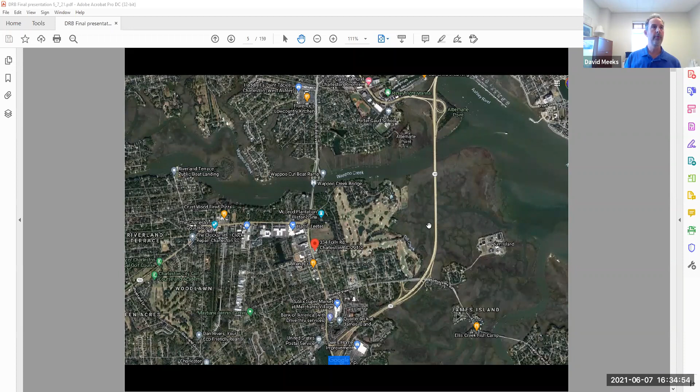Thank you, Erica. Just a couple context slides before we turn it over to the applicant. This shows the location, 334 Folly Road, and then there's a closer view. It's at the corner of Tatum and Folly, and it's adjacent to McLeod Plantation here.

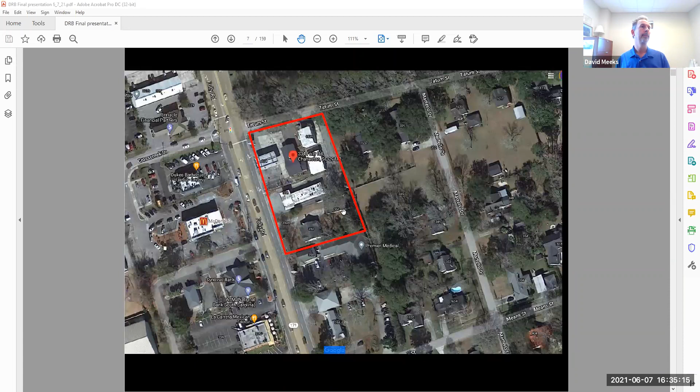And then this is a closer view. The board had seen this already and had approved the demolition of these structures. And then just some views into the site, looking down Tatum and then looking south on Folly.

With that, I'll turn it over to the applicant. Afternoon, can you hear me? Yes. I'm Chris Friend, I'm with Graham Group Architecture, and I'm here to present a different design than what you saw before.

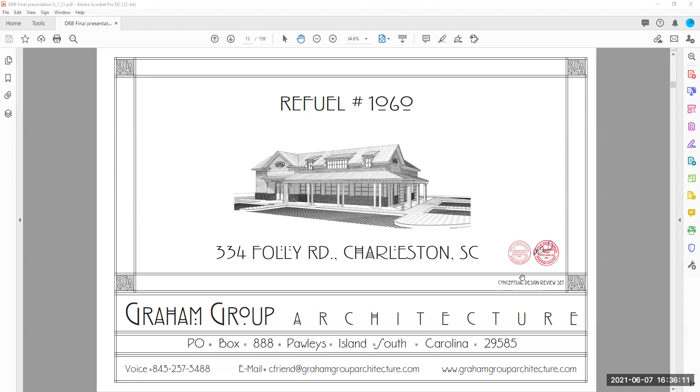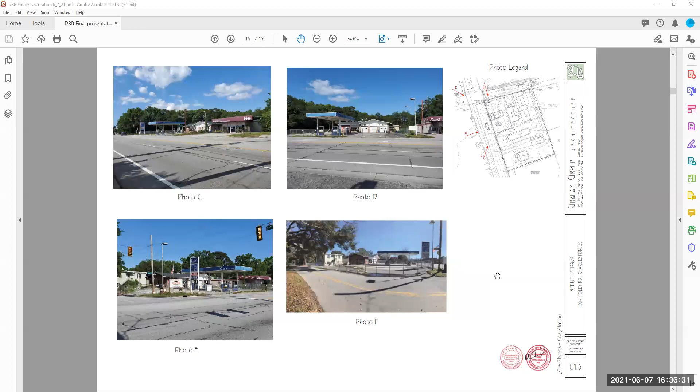David, if you could advance to the third sheet. These are some more site photos similar to what David just showed you all. You got an aerial view of the site and a little bit of the buildings across the street. More of the same, what the site looks like currently with the fence on it, different angles from Tatum and from Folly. Next sheet - these are the structures that have already been approved for demolition.

Which I think we could probably skip past most of that, given that you've seen it. If we'll go to sheet number 12. Unfortunately it's not numbered the same as when you sent it to me. You're right there, okay, back up one. Yep, that's it right there. This is the

Site plan that we would prefer. I understand there were comments from the previous submittal, but I'll try to explain the preference for both the orientation of the building and of the car wash. It is preferred that the building face the fuel canopy. The entrance, which is right now on the Folly Road side of the front facade, to the right of that is where the service counter is, with windows so they can look out to the gas canopies and kind of monitor what's going on there. It's a little bit easier for people at the gas canopies if they want to run inside real quick for a drink or something, just to access the building. There is a side entrance also on the east elevation.

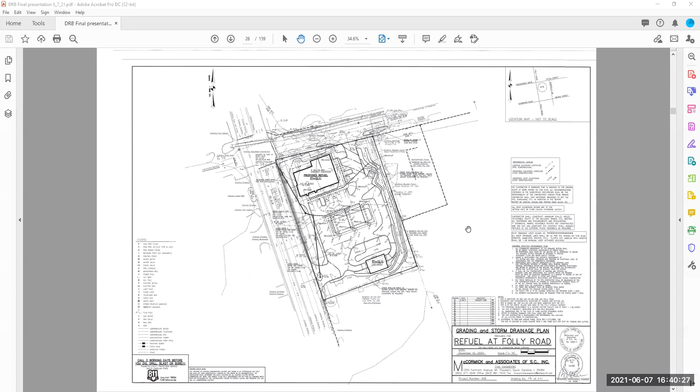We could maybe move into the elevations and renderings and cover drawings, David.

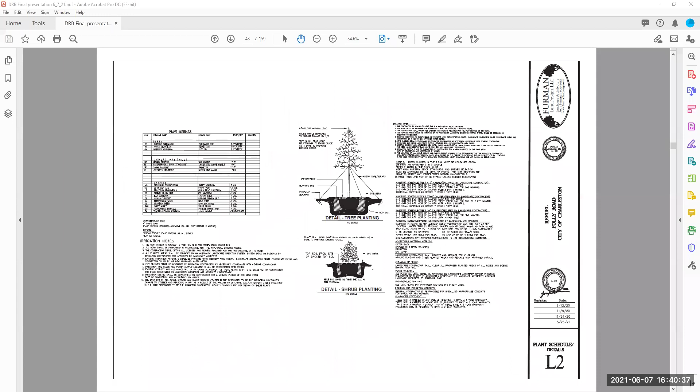Yeah, we'll start here. Okay.

The concept for the building was not necessarily to be a low country derivative, but certainly have some of that vocabulary in the details, with the low sloping roof for the porch, dormers, shed dormers, things like that. We tried to keep it fairly simple in form, but functional and attractive.

You'll go to the next one, please, David. It'll show the other views of it. There's also a porch along the back of the building, so that'll be more for employees. Mirroring the building will also allow easier access from this rear entrance to the dumpsters, which I think would probably be preferable.

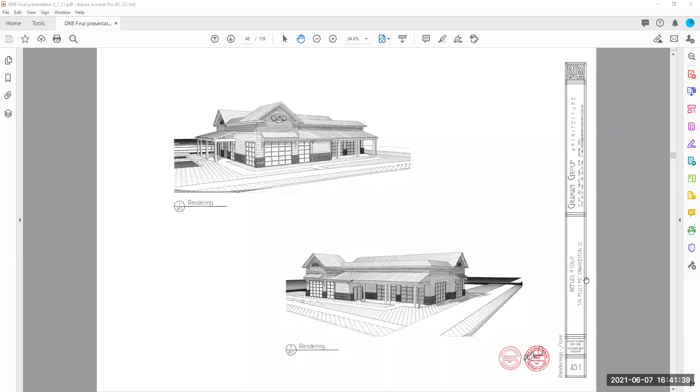We'll advance to the next one. Let's go ahead and look at the color stuff. Actually, the next one's the car wash.

Before I go into this, we'll present some better 3D renderings for the next submission. The person we used to do the color renderings was going on vacation the day that I asked him to do it, and he wasn't going to be back for two days. So we used a program in-house, and it kind of washes out some of the details a little bit.

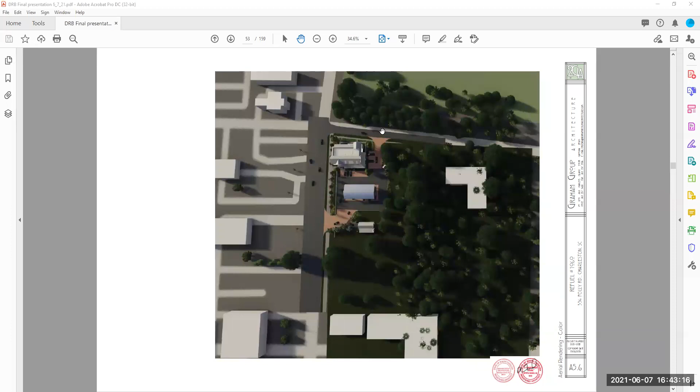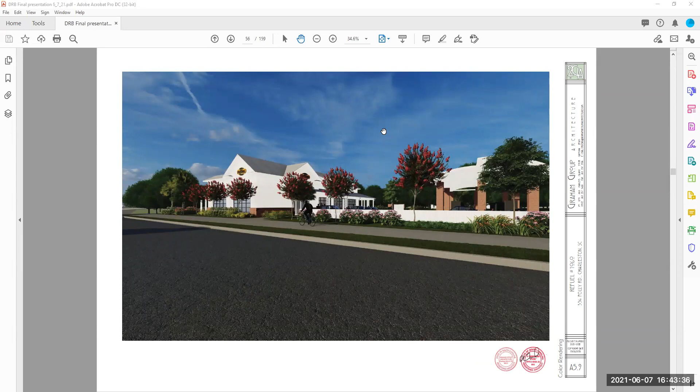The next one here, you're turning off of Tatum onto the property. And that's from the corner of Folly and Tatum. And this is coming up Folly Road. And that's the drive off of Folly Road there.

You can see kind of some of the mass of the buildings on the other side of the street. Another shot from Folly. This is going south on Folly. You can kind of see the car wash there a little bit. We're trying to screen it as well as we can with landscaping.

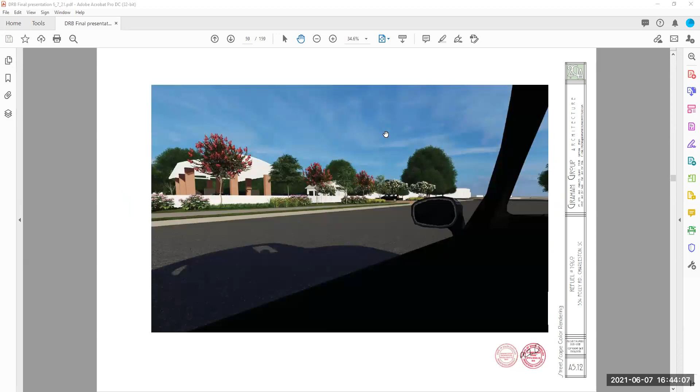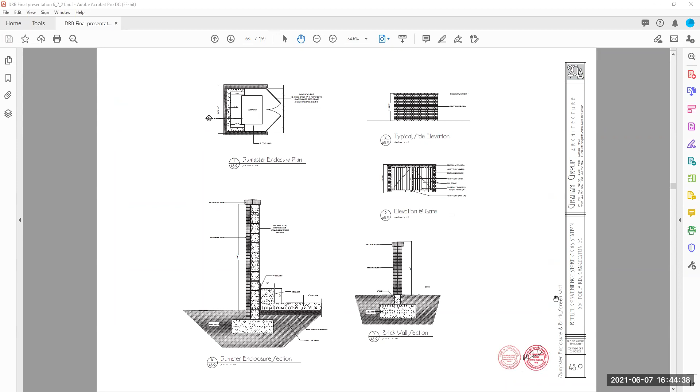And there's another view, this one's as you pulled onto the property. And then that's just dumpster enclosure, fuel canopy drawings, excuse me.

Okay, I don't know if Michael, the civil engineer, wanted to add anything. No, not really. This is Michael McCormick, the civil engineer.

The biggest thing I can see is we've added screen walls all the way down Folly right-of-way on each side of the drive. The proposed driveway location on Folly Road can't move; it's got to be centerlined on the Synovus curb cut across Folly Road as part of the TIA and T&T at the city, so that's a fixture. We just have to overcome the screening of the tunnel that is desired. That's all I have.

Thank you. Any questions from the board? I had a couple of questions, just curious about a couple things. Who may describe the use of the porches - there's two porches.

That site plan actually worked quite well, I think. The porch that's on the corner of Folly and Tatum, who uses that? That'll be, well, it was more to give it a more consistent look on the rear of the building so that it doesn't look like the rear of the building. But that'll be for employees coming and going.

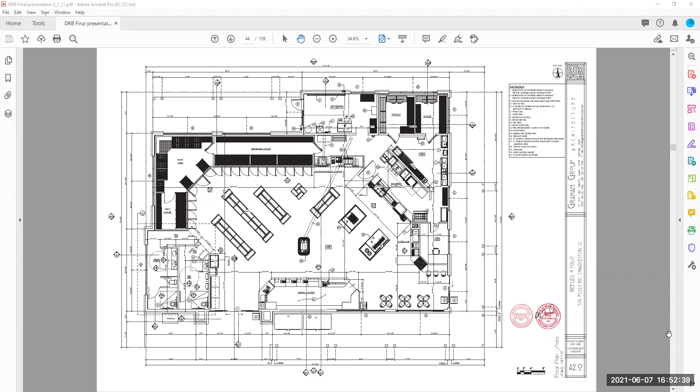Let me ask about the downspouts - I was trying to find them, and when I looked at the elevations I was confused. Do they go back to the wall? How are those downspouts, particularly? You have downspouts along the porches which go back to the column. The ones along the rear of the building go back to the wall. On the rear where you have the porch, they go underneath and back to the wall.

No, not back to the wall. Porches - all the porches just return to the columns or the posts. Okay, so the downspouts go down the posts. Yeah. There are some along the back facade where we have scuppers, and they just come down onto the roof below it, and then off of that porch roof there's the gutters.

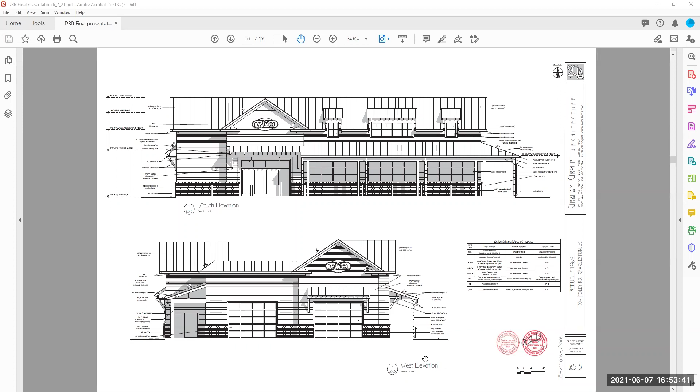Okay, one other question. On your landscape plan, L1, by the car wash, you show tanks. Are those below grade or above grade? They're underground storage tanks located next to, between the canopy and the car wash, but set off into the green space so sump covers and things like that don't get knocked down or subjected to vehicular traffic, so you run into fewer environmental compliance issues.

All right, and I was going to ask Chris one other question. Have you been to the site? Yes, sir, I have. Was there anything particularly inspirational from a design standpoint, or a context standpoint, that you felt was prevalent?

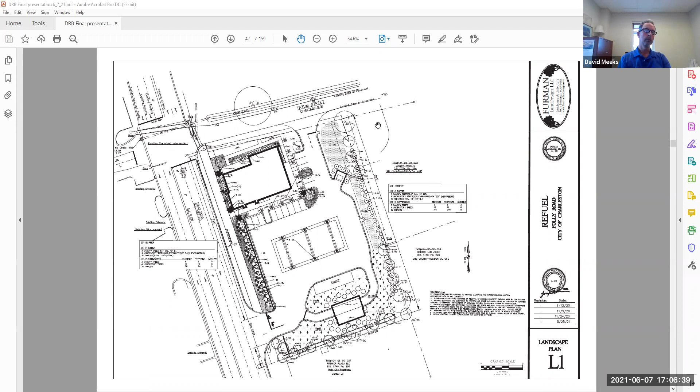We have a tree along that southern facade that can't be removed, and we can't be within a drip line, which is somewhat dictating the position of the building and the car wash. There's also some drainage requirements along there, which Michael can address.

Does anybody else have anything? This is Michael. We could certainly take a look at rotating that car wash to alleviate some concern there. But between the car wash and the property line, we're going to have a water quality swale there. I believe there's a couple protected trees we've got to stay away from, and so forth. But we'll make every effort to do it.

Okay, thank you. With that, we are now in board discussion and a motion.

This is Dinos, I guess I'll jump in first. I think the struggle that I'm having is not unlike some of the initial design that we saw a few weeks ago. I think the key issue is editing and simplifying the design.

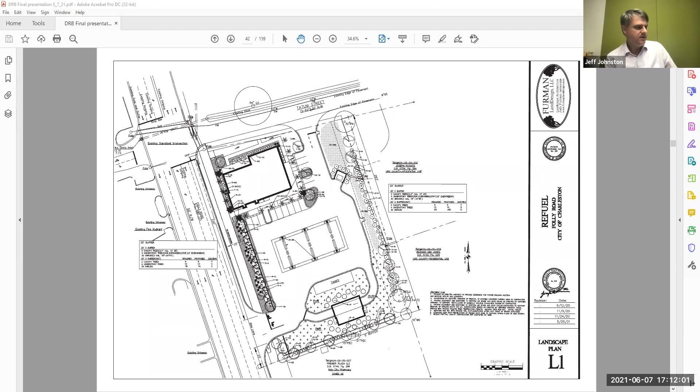I'm not sure I saw an elevation, and this is often the case with gas canopy structures where there's almost like a streetscape elevation that shows the canopy and the building in the same elevation. We rarely see them in the same scale on the same drawing next to each other, so it's kind of hard to tell how they relate to one another.

One suggestion might be to lower the brick on the gas canopy. The brick piers seem really heavy, but that might be a drop in the bucket to the bigger challenge with making the two more compatible.

I agree, Jeff. They're alien to each other as far as form is concerned, and not that the gas canopy isn't cool. The idea is very nice, but I think the relationship between the two geometries is just alien to each other and is almost conflicting.

So maybe the comment is just to try to figure out a way to mesh the two aesthetics or make them more interactive. And not just facadal - I completely agree with what you said. Not just facadally by putting a wave on the front of the building, but actually looking at something more substantive that brings the two together.

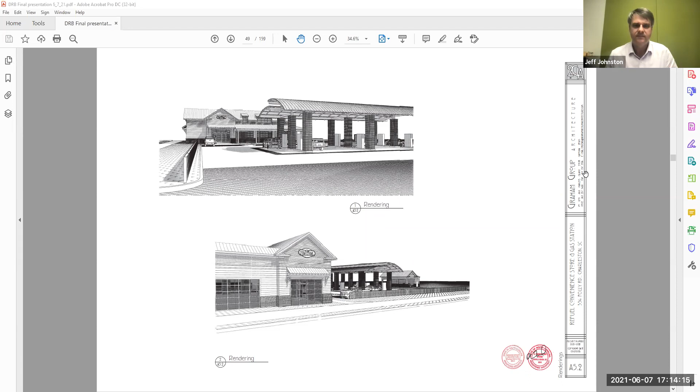Yeah, this is Andy. I mean, I agree, Jeff. I'm sitting here trying to find the right word, and the only word I can really come up with is confused. I feel very confused about this. You have the building, you have the gas canopy, you have the car wash, and for something that's supposed to all relate together, I don't feel like they do very well.

And the site itself doesn't relate to itself very well, doesn't relate to the outside world very well. And the set of drawings itself could use some editing, and I think that goes through some of my confusion. There are things in the set that aren't in our purview, and we probably don't need to see, that are just burdening down the stuff we have to look through to try to determine where we're getting to in this project. I don't know, I can't support, I guess, where we are right now, and I think there's a lot of editing and redesign that needs to go in before we can get there.

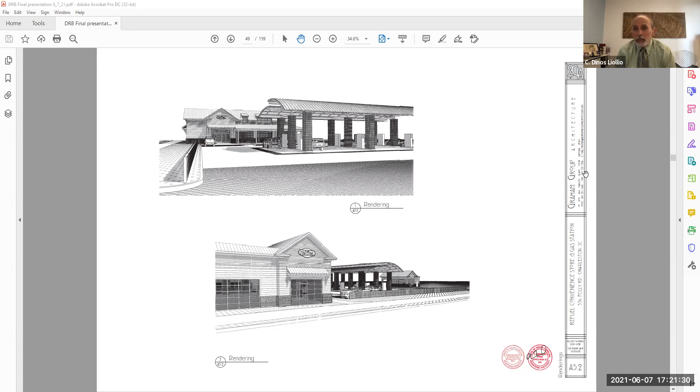DRB should comply with the submittal requirements. Look at the submittal requirements and comply with what is asked for.

Well, I agree with that. It is nice to have things like your grading sheet. The grading sheet's fine, that's really not what I'm talking about. There's just like erosion control detail sheets, right? Yeah, detail sheets. I mean, these things are just not really in our purview and not something we need to see.

And just once again, in a set where we're trying to understand what you're communicating with us, those just add additional items.

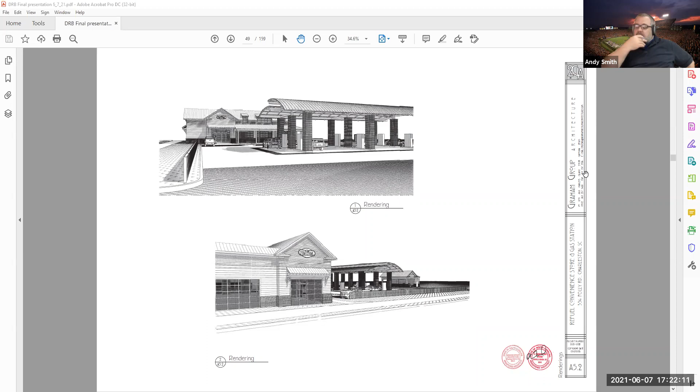I didn't touch on it because I kind of saw where we were going, but would like to add into the motion to edit the plant list and focus more on native plants rather than an adapted palette. I think it would really help the context of the project. Okay, Dennis, is that okay to add?

Absolutely. Okay, so we have a motion for denial with staff comments 5, 7, and 8, along with board comments: 1, address the reconciliation between the geometries of the buildings; 2, simplify and edit the design of the building to be more in line with nearby contextual buildings, particularly McLeod Plantation; 3, be honest in treating facades to the floor plans by eliminating facade treatments to the buildings that are not honest to the floor plan.

4, edit the plan set down to what DRB has purview over. And 5, focus the plant list on native plants. Is there a second? I'll second it, this is Andy.

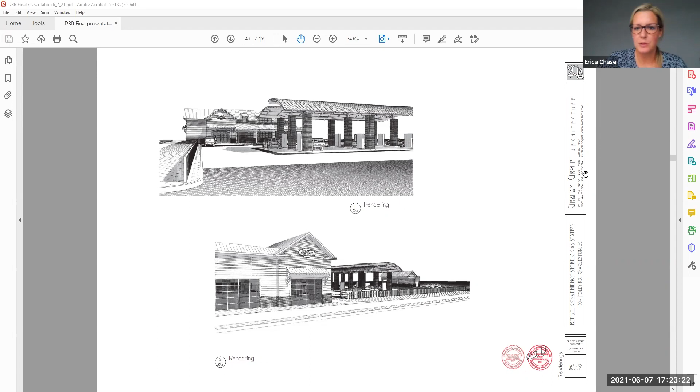Okay, I will now call roll. Jeff? This is Jeff, I'm in favor. Kristen? Yes, in favor. And then I'm also yes, in favor.

Thank you very much. David will be in touch with staff regarding the motions and comments.

Next on the agenda is item number 2, William E. Murray Boulevard at Glenn McConnell Parkway, requesting conceptual approval for a multifamily residential community consisting of 3-story townhomes and 3 4-story multifamily buildings plus a clubhouse.

I have just a few context slides for this. Here's the location of the site. It's at the corner of Glenn McConnell and William E. Murray. The board should be familiar with the site across the street to the northwest, which was the Founders apartment complex we saw recently. Here's the location, you can see the red boundary.

And then looking into the site, I believe the site's already been cleared from a previous applicant. This is all I have because the applicant has a few more context slides. So with that, I'll turn it over to the applicant.

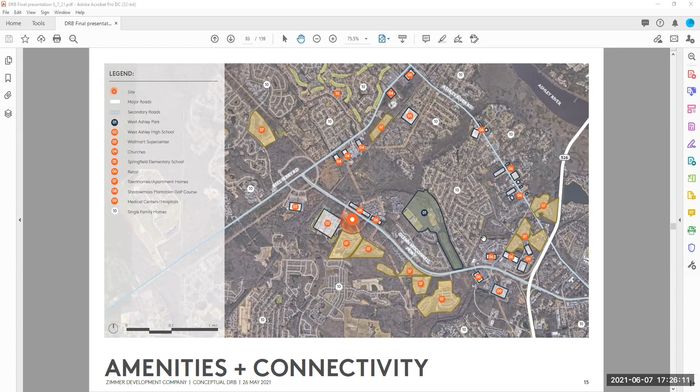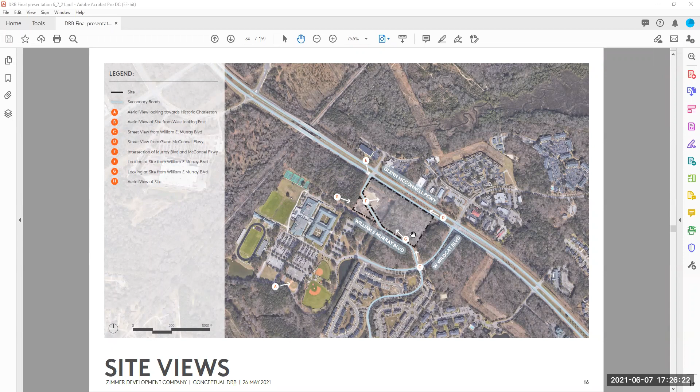We've kind of notated the significant features around the site: elementary schools, churches, shopping centers, and the major arterial roads. And next, please. These are the views we're going to show next, of the site from the various intersections and roads. So next slide.

Which would be the north of our site. And I think there might be one more slide just showing existing cleared features of the site. And then if you wouldn't mind going back kind of to the beginning where the site plan is.

So we worked significantly with staff on developing a site plan that we feel works for the site.

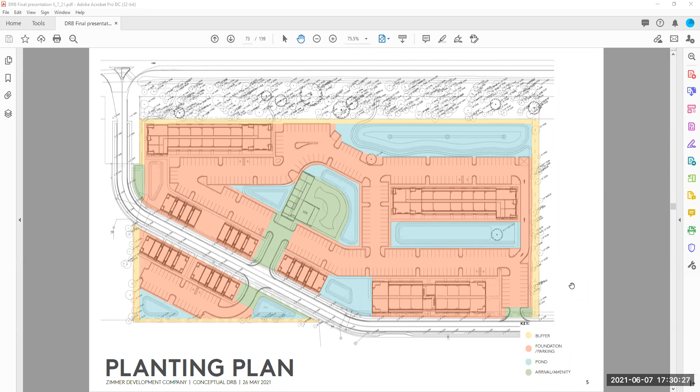Let's go to the next slide. There's basically a plant palette for each of these areas. For buffers, we're looking at evergreen shrubs and really trying to get an almost 100% native palette for this site. Also low maintenance, things that won't need to be pruned, that can naturalize and live happily in the buffer, where we want to screen and add to some of the existing trees around the edges.

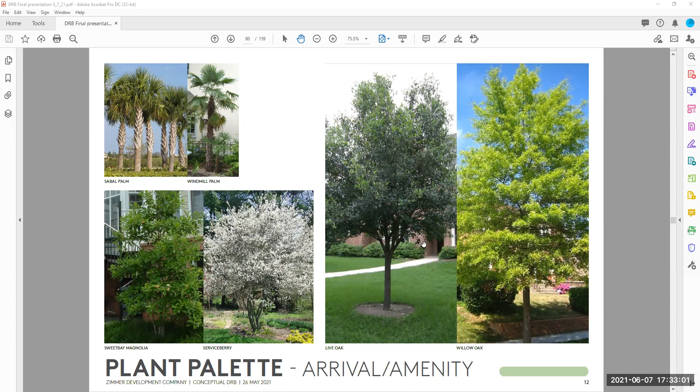Next. Okay, how are we doing on time? I think if we can fast forward to the renderings, there we go. Thank you, I have about 3 minutes left. Okay, but we're a little bit flexible if you go a couple of minutes over. Thank you so much.

So we have a few renderings included in the set. In the lower right-hand corner is a key as to where the rendering is taken.

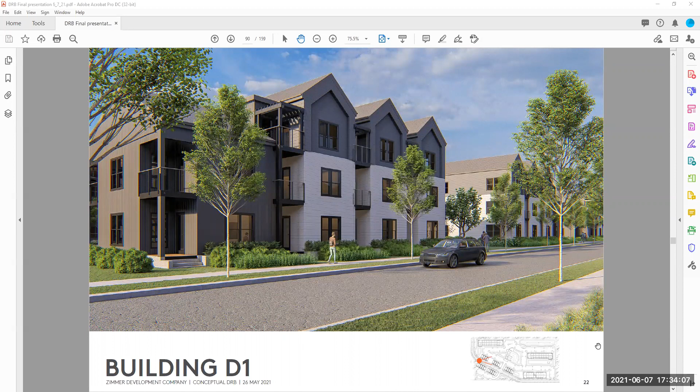This is giving you a view of the townhomes as you enter the site. You can see on the left there is a shorter 2-story building. We've then stepped the buildings up and added the gable roof forms, which are a nod to the historic Charleston neighborhoods. We think pedestrian experience is really important here, so we have entries off of the sidewalk and porches to activate the street, along with pergolas at the upper level to really engage the street. Next slide.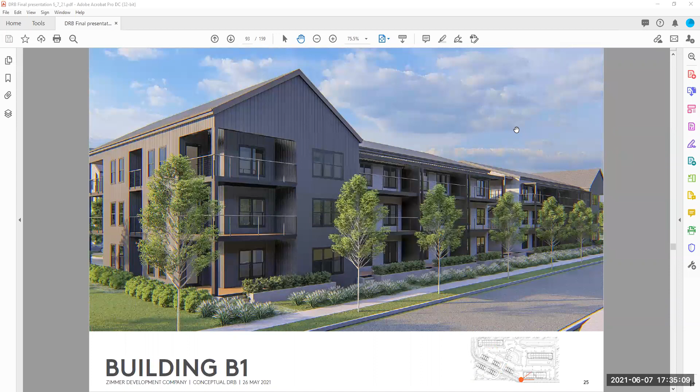Next slide, please. And then this is the 3-story building. As you turn the bend, there is a multi-family garden style walk up that again, we're trying to activate the street with entry porches. And then we've split it into 2 distinct buildings that have a breezeway in between them. So we feel this way we're really going to be able to engage the sidewalk and encourage activity on the street. And then I think we have one more.

This is the access as you enter the site. So you're seeing the clubhouse beyond as the central feature of the entryway with the 2 flanking lower height townhomes. We feel like this scale, the organization of the building scale, really paying attention to the pedestrian experience and using architectural cues from historic Charleston are the goals of the building and the development arrangement.

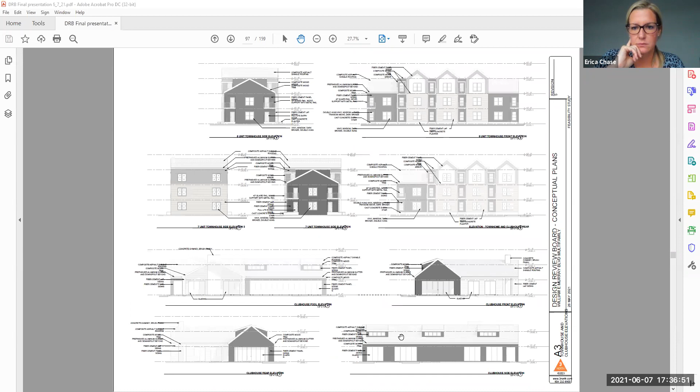I had a couple of questions, and I may have missed it, but in the packet submitted to the city that we got copies of, I didn't see a survey showing any existing elevations, FEMA flood zone, existing trees. I didn't know if I missed it or if it just wasn't included. We do have that, so we might need to. We are currently going for early site package TRC as well, and so we have that information. Okay, and is the project in Church Creek drainage basin?

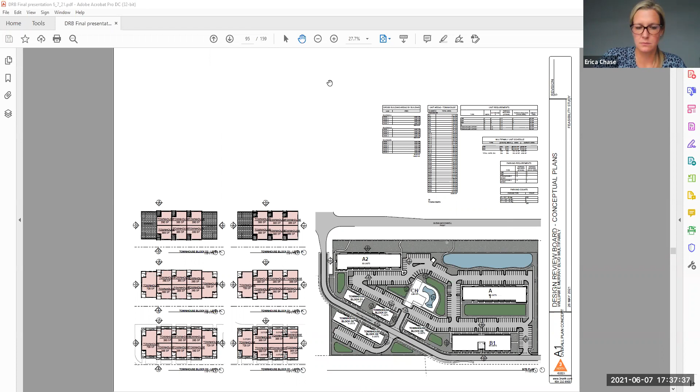I don't know the answer. Paul, do you know the answer to that one? Sorry, I'm seeing if he's on here. He's in the attendees, David. You'll have to let him in. Wait a second, sorry. I'm not seeing him. He's on my list, David. There he is, I'm sorry. He was here. I think he dropped off. I don't see him now. You still see him on your list? I do.

And the reason I'm asking is that there are significantly more stringent drainage requirements, which would affect the layout of the site. And I'm not sure. And then also, just curious from a survey standpoint, one about existing trees and is the site plan working around any existing grand trees? 2, existing elevations in reference to your FEMA zone. Just knowing if your first floor is going to be significantly higher than existing grade. Just trying to understand a little bit more big picture items on the site layout.

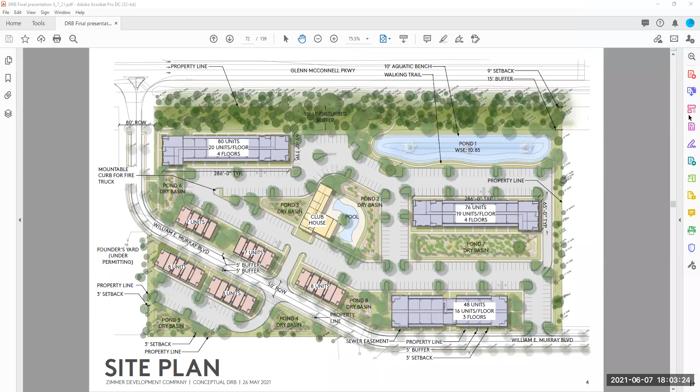Okay, so just the illustrative one that's in front of us right now. Correct. And also, I'd like to be clear that we don't have any excess parking whatsoever on the site. We have the exact number of units to parking spaces. And that's in accordance with zoning ordinance, or market rate? Zoning. Is that 1.5? Correct.

Got it. Any other questions? Or sorry, we're still in comment period, not questions. And Kristen, I apologize for cutting you off earlier if you wanted to speak on your comments.

Oh, thank you. I was just commenting about the clubhouse and the pool and that arrangement. I do like it, and overall I agree with all the other comments. The balconies and the facades and certain elements of the design I do like, but I also have my agreements with all the comments of staff and the board as well. That's all I wanted to say. Thank you, sorry for cutting you off again. No worries. Any other comments or motion?

Well, before that, I'd feel remiss if I didn't have some chance to chat. It's interesting, I guess when I imagine driving in this parking lot, it seems challenging, and I think the reaction is to make it feel more intuitive and organic, like that east entry. As soon as you enter, you kind of have to turn, you either park or you have to turn left or maybe turn right to go around the building. Something a little more organic and intuitive feels more natural, even if it's slight curves of that longer parking aisle between William and Murray, so that your vistas aren't 600 feet long, your vista might be 300 feet long. But I wonder if you could solve it in a more organic way that's not a total rewrite, but more of a massaging of what's here.

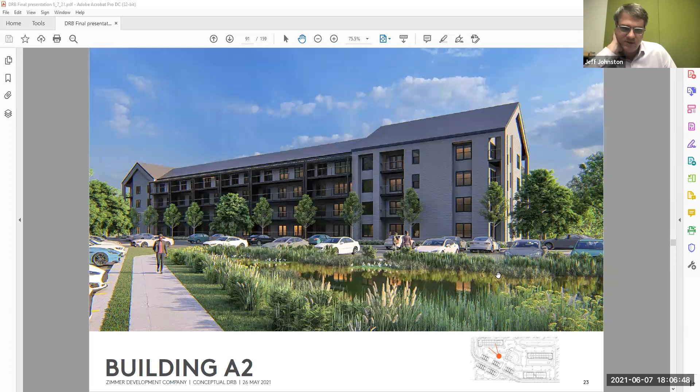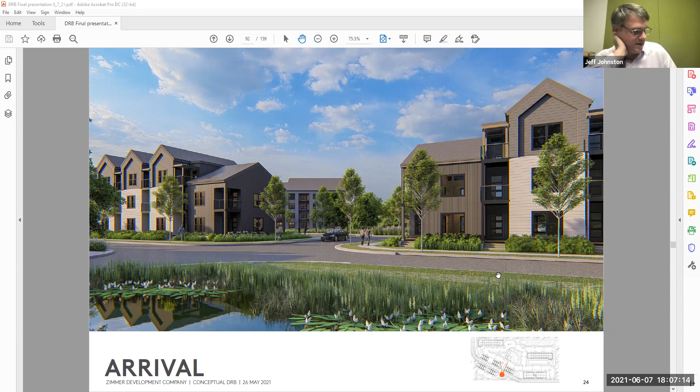Part of it is on the next rendering, called Arrival. Hard to tell here, but you've kind of got the gable form, and then there's an outline of the gable form that goes down, turns vertical, and on top of that you have like a traditional fascia. To me, the traditional fascia seems a little extra. But like I said, I think, and then the next one, building B1, if we can flip to that one, building B, yeah, this one.

You know, we're so close to just breaking this building up. We practically are. We've got that breezeway with the stairwell in it, and we've essentially just mirrored the mass left to right. And I kind of appreciate Dinos's perspective on making these buildings smaller.

You've already got the break, and you're already building 2 exterior walls. You could have some more freedom with the massing, even if one of these wings were mirrored so that it's flat gable, instead of gable, flat gable. Might give that impression of more buildings. So I think, from a floor plan perspective, you're already broken up, but we've chosen to make the massing so much alike that you can't tell it's really 2 different buildings.

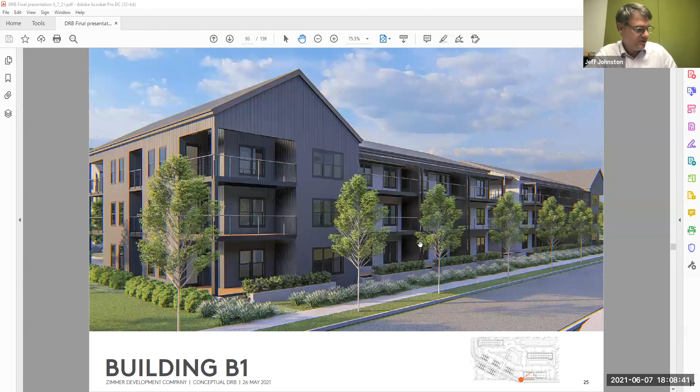So I guess what I'm saying is I think I appreciate the idea of it being two structures, of breaking it up, which I think will help. And maybe it's in terms of the site feeling rigid, and I'm trying to find the site plan again. If you were to have some more flexibility in the buildings moving in and out rather than just being on the same plane, you might achieve some of that organicness without manipulating the site greatly.

I still think you need to manipulate the drives, but I think having more building forms less lined up would help give some of that relief in the site plan. And you've got the flexibility, it looks like, in these longer units by virtue of the open breezeway. So I think taking that and pushing that idea a little bit further would help in a lot of ways.

But I applaud the effort of keeping the architecture honest and being, the mass is what the mass is. And I'd encourage you to kind of hold on to that, but take some of these suggestions that we've said to make it better.

And again, it might be a minority here, but I think that clubhouse entry is really intriguing. Maybe it's underwhelming because the proportions could be slightly improved, the scale and proportion. I'm looking at the other arrival perspective. Wait, sorry to make you go back and forth.

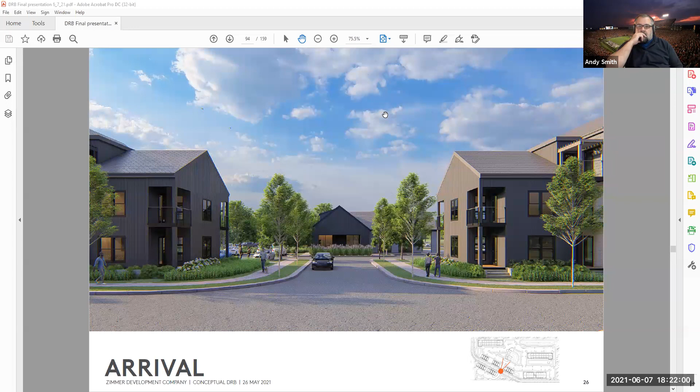Well, Erica, that was staff comments 5 through 13. Oh, sorry, thank you. I'll amend the motion to include staff comments 5 through 13. Thank you. Is there a second? I'll second that motion. Okay, I will call roll.

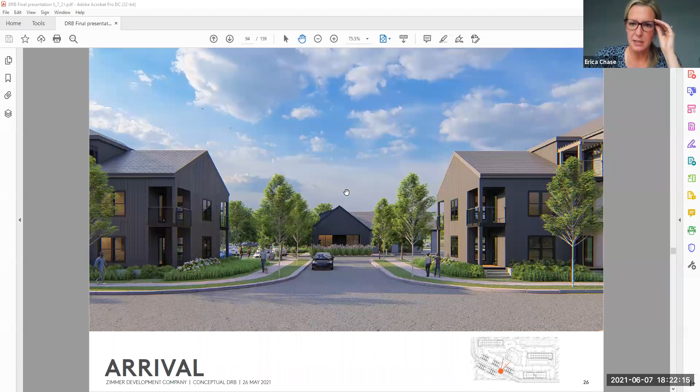Daniel. Jeff? This is Jeff, yes, in favor. Thanks. Kristen, yes, in favor, and for the record, Dino seconded the motion. And then myself, yes, in favor.

Next on the agenda is 829 St. Andrews, requesting conceptual approval for a 2 to 5 story mixed use residential development. And give me just a few minutes and let some people in here.

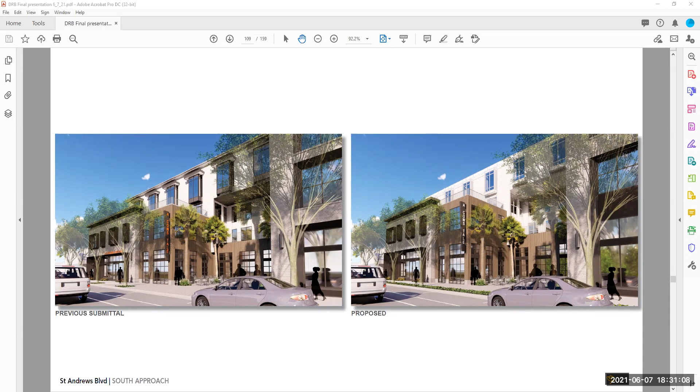We also have some larger detailed elevations starting around sheet A-10 that give you a better sense of the specific materials and details associated with the transition of those materials in those elevations.

Go to the next slide. A big idea here was, again, the hierarchy of elements and the competition between the foreground of the buildings along St. Andrews and the background of the larger forms.

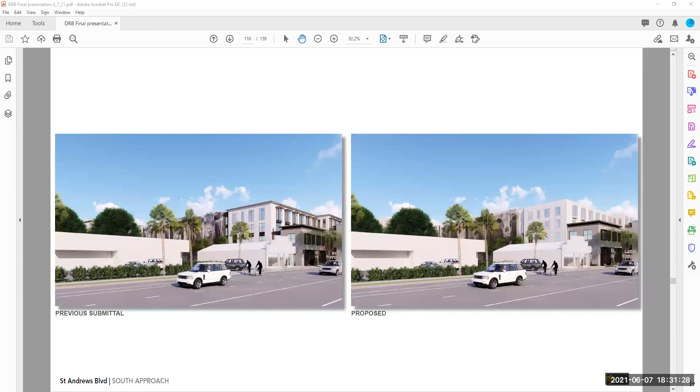We have diminished the presence of the top of the building and simplified the upper form greatly. We did not eliminate any materials, rather we eliminated the quantity of transitions and use of those materials to create a more uniform and consistent legibility to the project itself.

The top of the building participates in various treatments, all maintaining the same profile as it touches the sky in a diminished way. That was very purposeful, and has been very successful in its application throughout the project.

Where possible, elements have been refined to lighten as they move up the building, so now we don't see anything dark or ominous over the top, whether that's a shade structure or the way materials touch the sky in a background nature.

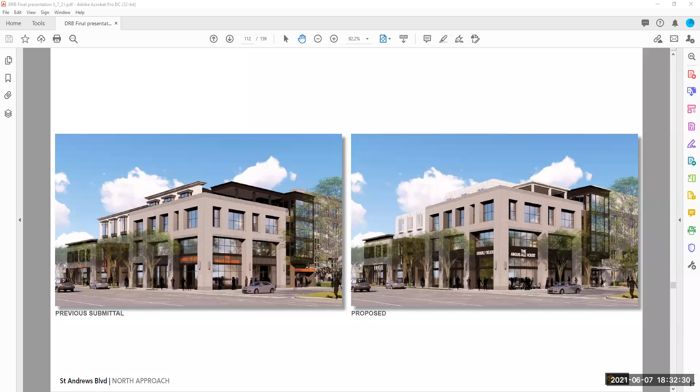Albeit in many ways subtle, there's been quite a number of design changes, ranging from material transitions to advancement of bay windows and rooftop elements and structures, all manifesting toward a place that will layer and provide focus and emphasis on the people space that we want to embrace.

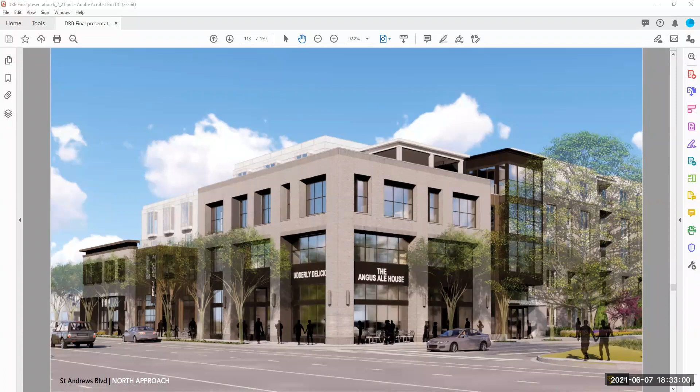Next, we transition to the residences on the ground. Closest to St. Andrews, we're most concerned about the active nature of St. Andrews and the residents who live here. We've layered that; the landscape team has done a wonderful job providing variety and an animated landscape design that layers and provides separation from the public realm into the private realm of those residences.

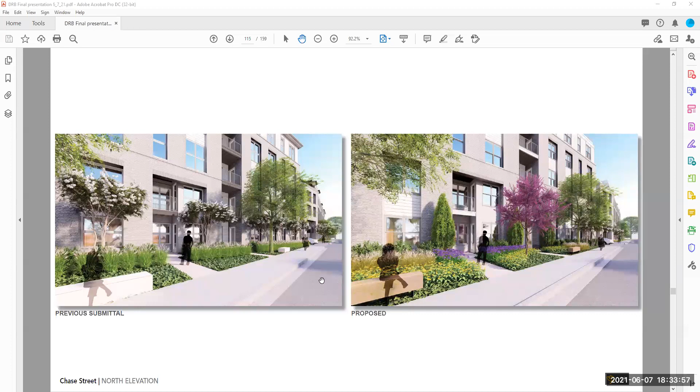This particular comparison shows a number of the subtle changes we made and how they manifest, along with a couple more significant design moves. We no longer have brick that extends above the fourth floor anywhere on the project, and parapet detailing, that diminutive nature as it transitions to the sky, is carried around so it's not in competition with anything anymore.

It allows the recesses and massing of the building to read plainly. It provides a uniform legibility and preserves the focus on the elements we want to really pay attention to and celebrate in design.

I'll do this fairly quickly. You can see how some of those refinements translate down to the rest of the building. We're preserving and more consistently applying use of brick. We've eliminated some of the dark materials off the top of the building, and really enhanced what's happening down around the street level.

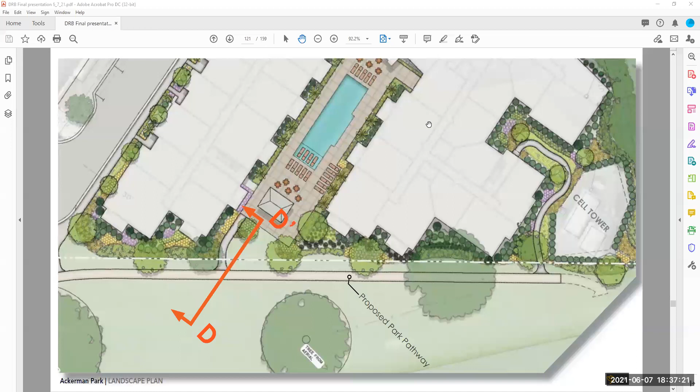This is a little more detailed view of just how much energy is really in this landscape as it transitions and moves from the scale of the building down into the park itself.

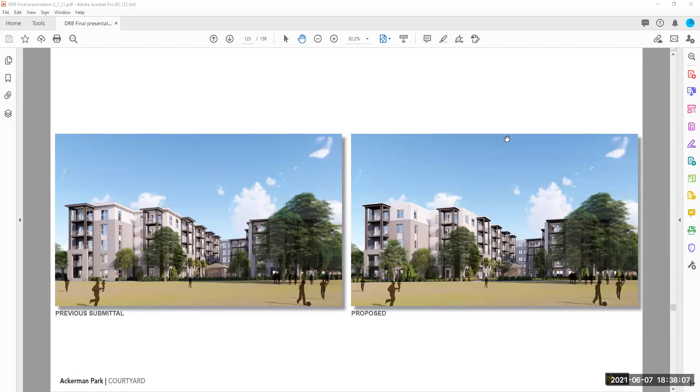I would point out the balconies — we've actually refined fairly significantly some of the proportions of the porches on this side of the building, the way they come to the top and the way those roofs interplay with the finish of the top of the building, in a fairly consistent way, but one that I think continues to reinforce the expression of those porches as a place for people and a place for the residents to embrace the park itself.

There was some specific discussion about this portion of the building at the very end of the last presentation, and we took some time to go back and try to understand what that comment was all about. We applied some of our original thinking to the overall shape and legibility of these elements.

We wanted to keep them calm, consistent. We don't want them to be overpowering, but simple. We did incorporate more brick in this solution, but I think one of our keys here is just how simple these forms can be and need to be as they turn the corners and really become a passive part of the project to the project's south.

So in its consistent treatment, its detailed use of materials, we're really just trying to complete the project in a cohesive way while maintaining the quality of what the project's doing on all of its sides.

I did that very quickly — there's a lot of detailed information in the set. We're happy to answer questions, talk more specifically about design decisions and maybe some of the subtle things that are evident in the renderings or may not be. We look forward to the discussion and working with this board to come back for preliminary approval. With that, thank you.

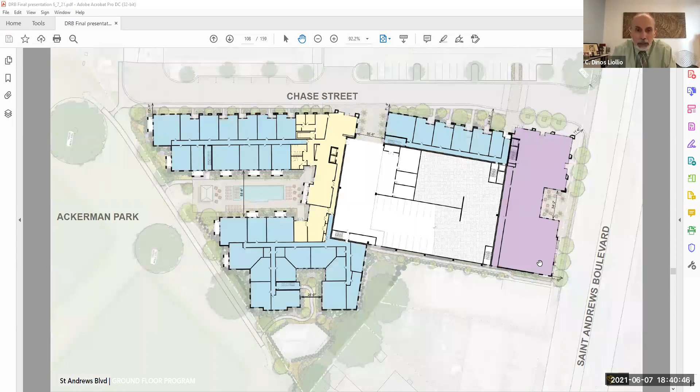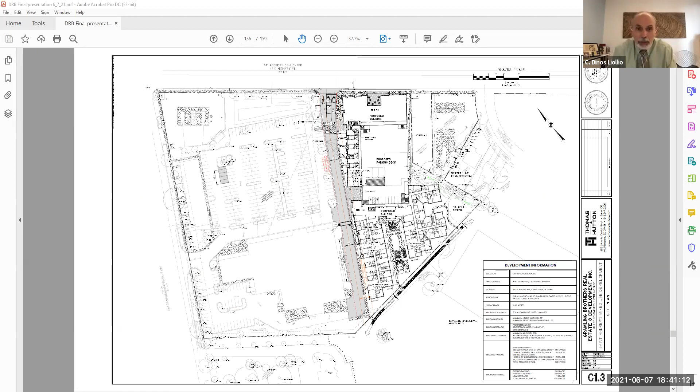David, can you go to C1.3? Oops, sorry. That's all right — I didn't think that looked like Nathan's project. It was on the civil drawings. Oh, I'm sorry, civil drawings, yeah, it's back in this way. And I can ask — there we go, there we go. Can you blow up into that, I'm drawing on my screen. Keep going, blow it up some more, and move it toward the center. That works — yeah, that's perfect.

On the Mix One property, which I understand is owned by the same developer, you're abandoning a property line at the base of that. I was just curious why.

I'm gonna have to phone a friend on that one, actually. Tony, do you have a moment you can? I'm not sure I know.

It was just when I saw it, I was curious. I didn't know if it was for anything specifically dealing with this project, but it just caught my eye.

I can— No, oh okay. I can answer the question.

It's Michael Harper. You know, all of these properties were separate parcels that we assembled over time, and they're all zoned general commercial. They're all zoned at 26.4 units of residential density per acre.

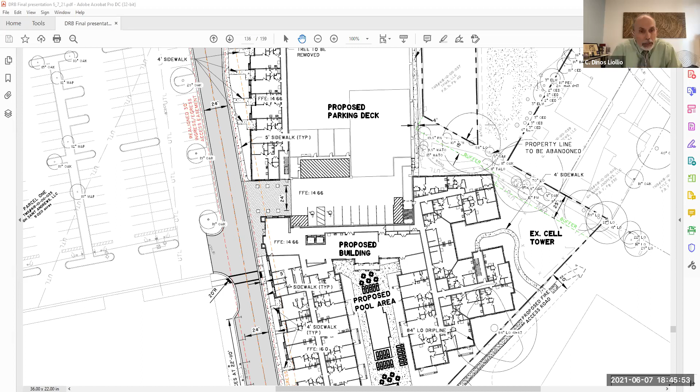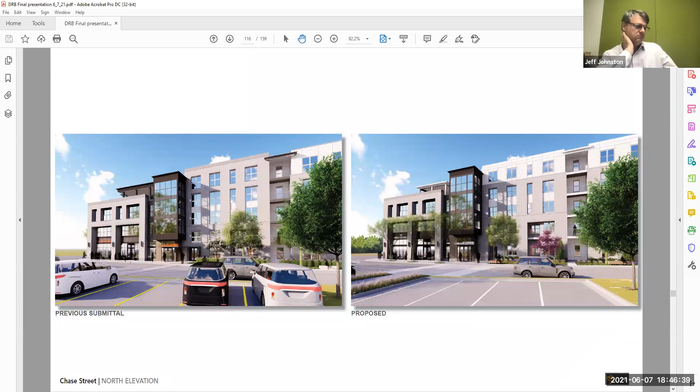Nathan, you had mentioned also a tabletop crosswalk. Yes, if you slide back—it's probably most visible on slide 14 of the presentation, David. So there's a tabletop crosswalk: you see the main entrance there that takes you up to the rooftop, and there's a small tabletop connecting from the island across. We expect some people visiting this retail and project to park in the parking lot, and we tried to be very deliberate about giving them a safe, well-designed way to get across that drive aisle.

I just tried drawing on my screen too, Dino, so you're not the only one. We need to put our pens down—I've got pen marks all over my screen, Nathan.

So basically the landscaped portion kind of defines an access across the tabletop walkway. Correct, yes. Is that what I'm reading? Okay.

I was just curious about the abandonment of that property line. If it has nothing to do with the evolution of this design, we don't have to wait for an answer, Madam Chair, as far as I'm concerned—I was just curious.

Oh, Tony Woody is available. I had one more question. Go ahead. Hey, I'm sorry, Madam Chair.

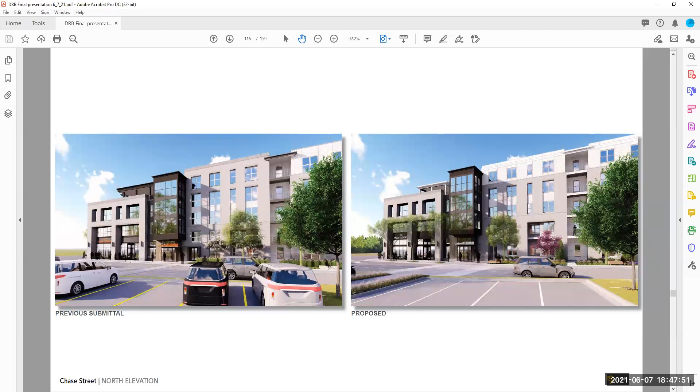This is Tony Woody. Yes, I think you all got it right in our absence—it was early on in the site discussions, we talked about abandoning the property line, bringing the MEX one into the city, but ultimately, because the MEX one is in Charleston County, unincorporated, and not the city of Charleston, we cannot abandon that property line, so it will not be abandoned. Okay, thank you, Tony. Yes, sir.

I had one more question. How were the sidewalk and pathway widths determined? They seem to vary throughout the site plan, mostly between 4 and 5 feet.

Could you talk through the thought process there? Maybe David, go to slide 3.

Granted, this is a more graphical representation and not the technical one. I think the intent of the design was to create as active and fluid a pedestrian space as possible along St. Andrews. Where we expected more people, you'll see broader sidewalks and more hardscape, with more planters and other site furnishings along that area.

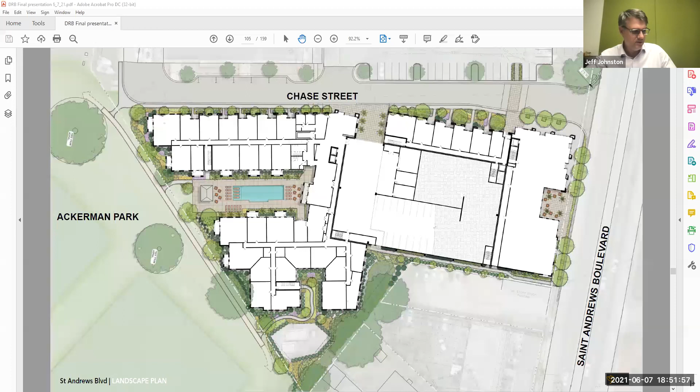Thank you. Any other questions from the board? To couple on that, if we go to the technical documents and look at L1.1 and some of the other L sheets, you can start to see the sidewalks in diagram.

I think the last time we had this application, we had a lot of questions about what happens along St. Andrews, specifically the relationship between the building face and the curb. We'd asked for this blow-up with some dimensions. We got the blow-up, but I don't see any dimensions, so I'll have to ask, let's walk through some of these.

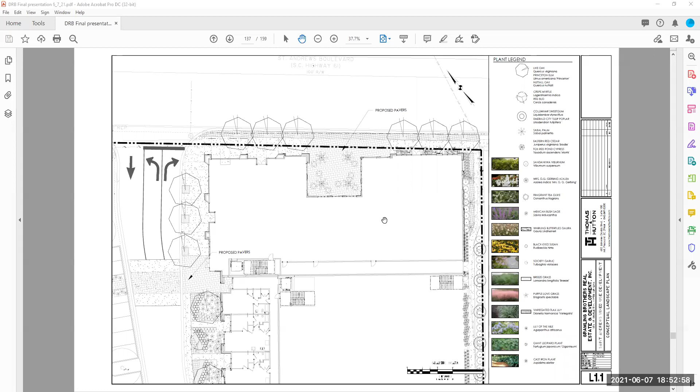On the northeast corner, between the building and the curb, is approximately how many feet? On the right-hand side, that is 11 feet 6 inches. Between the building and the curb? Correct. I think the dimensions you might be looking for are actually on a different sheet.

Let's try page 106 of the presentation. Sorry, I was trying to get them in a place, Jeff, where it would be clearer. So 11 feet 10, it was wider than I thought. Where I think you were asking is down there in the bottom right-hand corner - it's 11 feet 10, slightly behind the adjacent bridal shop.

Got it, 11 feet 10 on the bottom, and at the corner it's 11 foot 6, is that what I'm seeing? It is, and that's a little deceiving because that's the tightest point on the radius, and the radius is set into the building. If you went out perpendicular from the face of the building to the curb, it's closer to 14 feet.

On that 11 foot 10 zone down at the bottom right, how wide is the verge? It is 4 feet. And that is consistent just along St. Andrews - there's no verge along Chase, which is different.

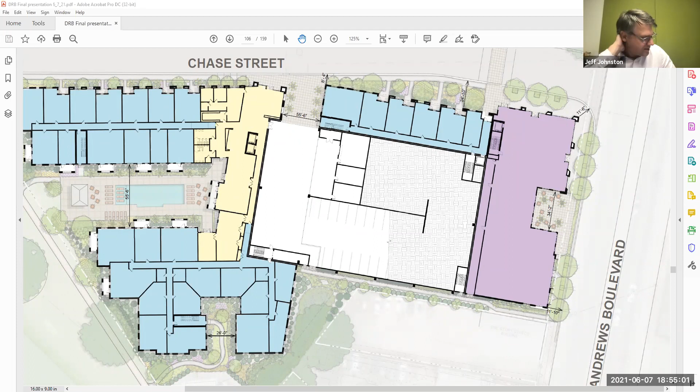Okay, right, because you've got 11 foot 10 minus 4 feet. And it looks like there's some planted areas. If I go back to L1.1, there's some planted areas, so the continuous sidewalk looks to be 3 to 4 feet less than that. So it might be like a 4 or 5 foot walk is what I'm seeing.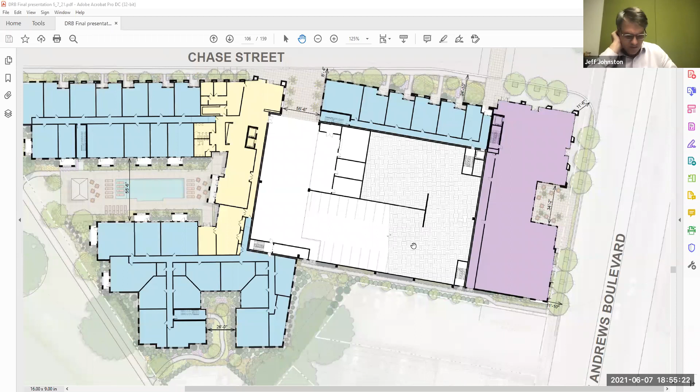And that would be, like I said, L1.1, draw on page 35. You want me to go there, Jeff? Well, I think it'd be helpful, yeah. Which page, sheet L1.1? It's in the technical document.

So if you zoom into that top right corner, we've established that from the building face to the edge of the curb is 11 foot 10. There's a 4 foot verge that makes to the edge of the sidewalk, to the corner, 7 foot 10. And if you zoom in a little bit more, you'll see some more planting areas there.

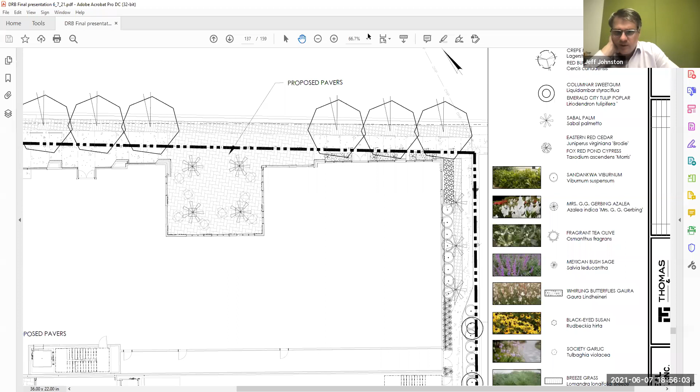I'm just trying to understand what I'm seeing, that's all. That's fine. This is about 5 feet, Jeff, outside of the planting areas, at the tightest point. Got it. About a 5 foot walk connecting.

Okay, great. And then as I see, 3 oak, that looks like live oak trees according to the legend. And then the sidewalk broadens to a paver area and goes into this cool little courtyard zone and continues on to the corner of St. Andrews and Chase. But at this particular spot, the sidewalk chokes down. Could you maybe speak to why it chokes down right there, and maybe how it relates to the paving in place at the neighboring site?

So the neighboring site, the sidewalk goes straight to the face of the building. We are playing a little bit of a game. So the actual dimension - I've got to phone a friend here - it's 5'6" of actual sidewalk at its narrowest point there on that corner. What you're seeing, those planted areas in the face of the building, participate in these sort of shadow box profiles that we have developed in the architecture there of the facade.

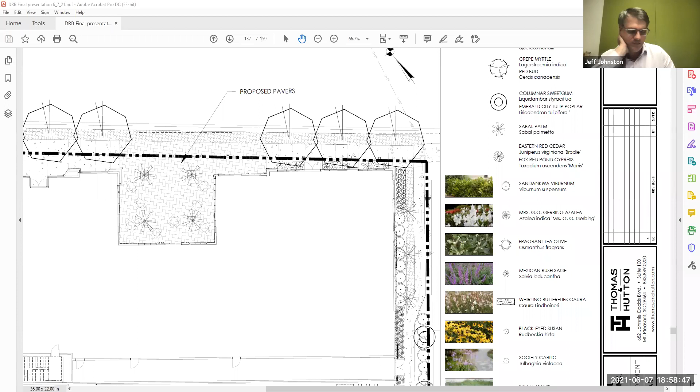Going back to how this interacts with its context, and this is a finer detail, I think how it relates to - I think that's Bridals by Jody, isn't it? The adjacent property. It is, yep. Okay, understanding how that sidewalk exists in place and how we're going to adjoin it is an important detail, and maybe we're just not quite there yet with this. So go to the slide - I guess it would be the slide that said 'Thank you, David.' Slide 23.

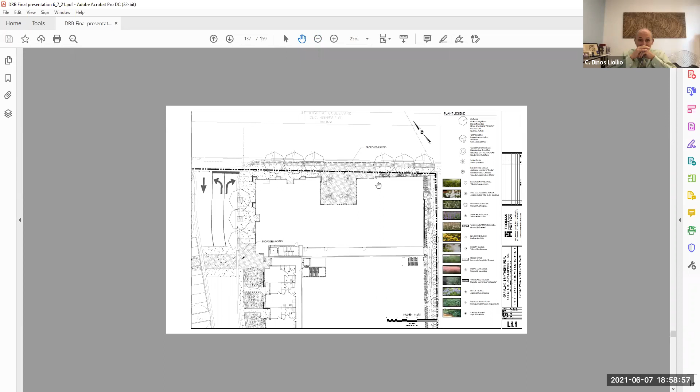And you might say, we've rendered it, why does this matter? It's a concept design, and to some degree you're right, but it's the smaller things - when we are integrating into an established context, that is the bigger things. So at some point, this little thing becomes a big thing.

So does the Bridals by Jody have a verge too? I'm sorry if I - does, yep. I'm looking at Google Earth now and it does. Okay, gotcha. I don't know about width or dimensions, but there's curb, verge, and sidewalk. Got it, thanks. I believe our verge is slightly wider so that we can get street trees in it.

Have y'all - I know we've talked a lot about this project - in terms of street trees, are there any underground utilities that would prevent trees from being there? Not that we're aware of. Right. We may find something, but so far so good. Right.

And if without trees, would that drastically change the design or the approach? I like that, that's an interesting question. I'm not sure I've put a lot of time into the reverse answer of what we've done.

We very much like the introduction of a street tree here for the layering of scale, and frankly the quality of space that we get along St. Andrews by doing it.

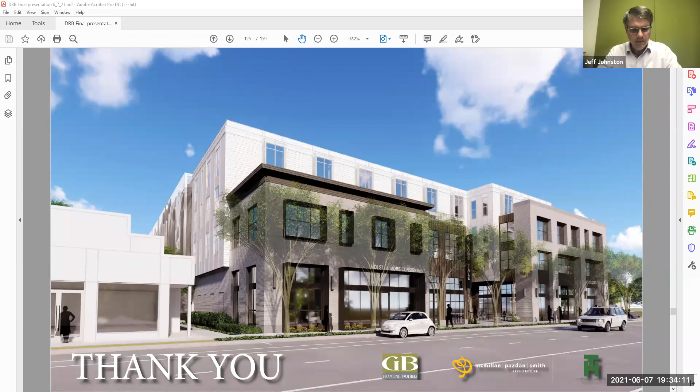Also, I just wanted to say that Jeff brought up a really good comment about the trees on St. Andrews, whether the utilities underneath the street would even allow for those trees to exist there. I guess that's kind of a huge impact on the look and the face of the entire building if those trees can't exist, or that size tree can't exist.

I have a comment. Was that Mr. Harper? It is. If we're speaking with us being in board discussion, if there's anything that we're stating that is inaccurate, you're welcome to speak.

But otherwise, unfortunately, procedurally, we're not able to receive feedback otherwise. So I'd like to speak to a potential inaccuracy. Perfect, thank you. So what Ms. Zimmerman said earlier about the path, am I wrong in stating that that's in the right of way, not on private property?

I don't know specifically how it's worded in Plan West Ashley. Madam Chair, yes, that is what the diagram in Plan West Ashley shows, is a 10-foot path in the existing 100-foot right of way. Okay, does that right of way, what is currently shown with parking and bike lanes? Correct. Okay, so I'd like to finish my point too, if I may.

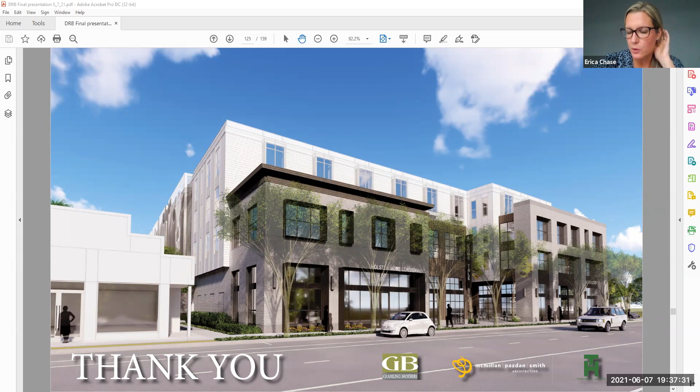Understood, and thank you, Eric, for clarifying that as well. I'm sure the board knows, but Eric's on staff with the city, on the West Ashley revitalization. I forget exactly what your title is, Eric, but that's a fair statement? That's a good job description. Yes, ma'am. Okay, thank you. All right, back to board discussion.

May I, in all fairness to the board, we received dimensions. We know that the first 2 applications were denied. The third one was deferred, and now we've received dimensions on the site plan. I don't know if this is so much an issue dealing with the right of way. My fellow board members may disagree, but I think these are architectural and site planning comments, not throwing the responsibility back to the city, but the building has been hugging the street very closely.

And the idea that we can correct the issues now as we go forward, and as Councilman Shahid commented, this is going to be the precedent and set the model for everything forthcoming, and it's so close. There's just some more tweaking, and I'm not advocating a deferral or an approval at this point in time. I'm just simply saying that as a design element, getting some more space between the curb and the building would be a great asset to this project.

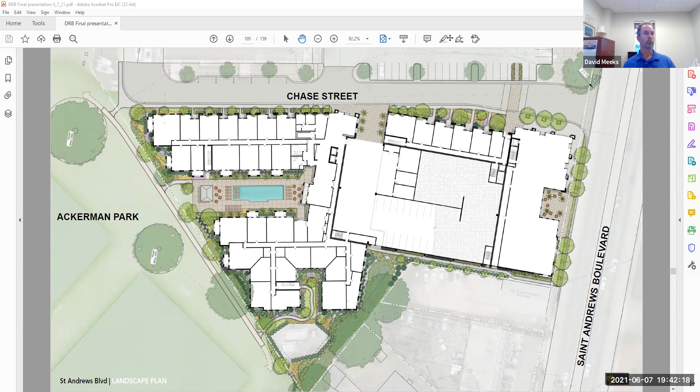Nathan, may I ask you a question? Madam Chair, may I ask the applicant a question? Yes, thank you.

Nathan, on Ackerman Park, the white line that you're showing, is that the property line or the setback line? So it is the property line. And is there, are we as close to the setback as we possibly can be? Or is it essentially there is no setback there, Dinos? Okay.

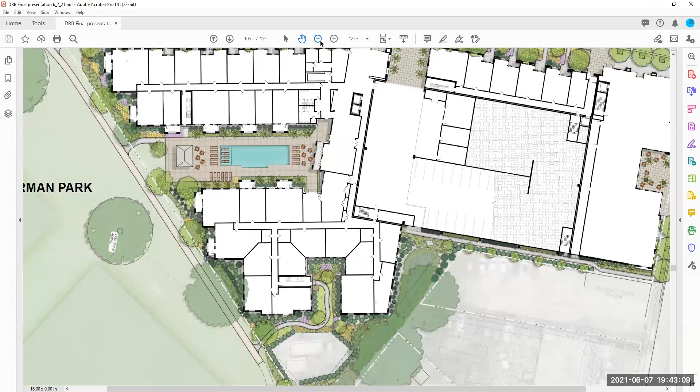There's a couple of easements that we have to stay out of, but we've worked that, and we've worked closely with DRC with proximity to existing trees and some other elements.

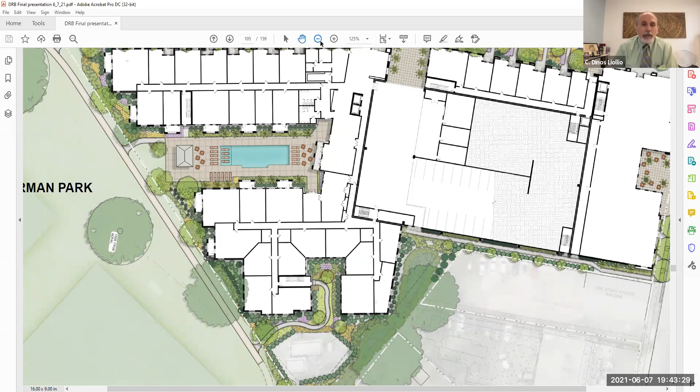And when you go to the corner of Chase on the north, I guess maybe that's the northwest corner up there of the building. Can you blow into, I'm pointing again, can you blow into the corner of the proposed structure right at Chase Street where it makes the turn towards Sycamore? David, thank you, my friend.

Madam Chair, this is Michael Harper again. I've got one more clarification slash inaccuracy I'd like to address at some point too. Dinos, so do you want to finish your thought first, or are we? No, okay, that's fine. Mr. Harper can go forward. I was just looking, thank you.

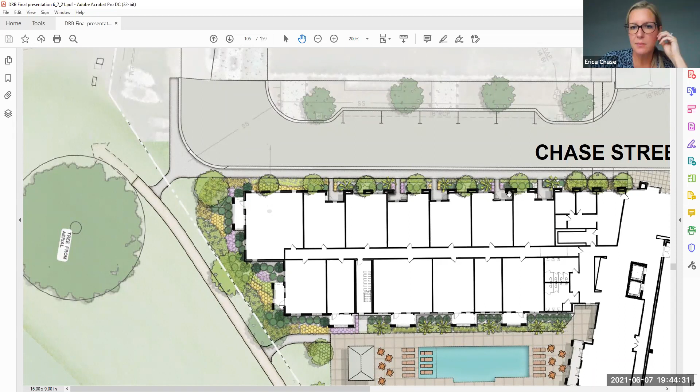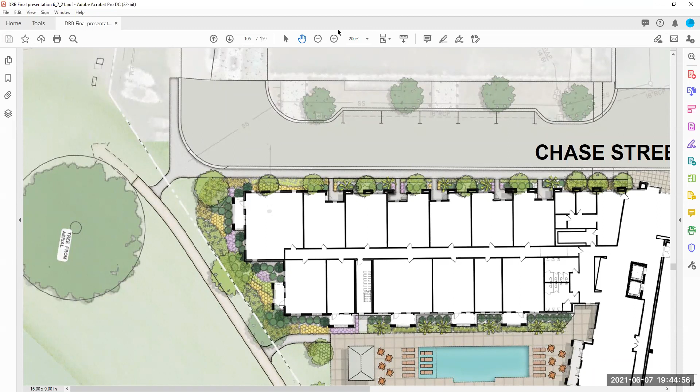Go ahead. Well, we're obviously, our wheels are spinning here on what we're hearing. And I know we've got a landscape architect commenting on a few things, but it looks like in the West Ashley plan there are a couple of different recommendations for walkways. One of them is a 5-foot walkway for Plan West Ashley. So just wanted to point that out to the board.

Okay, thank you. Dinos, do you have any other questions or thoughts? No, I think I've probably expressed everything to the greatest extent possible.

I'm studying the plan in more detail for a moment just to see if there's anything else. I really have no other comments. I think I'm probably just repeating myself now. Any other comments or motion?

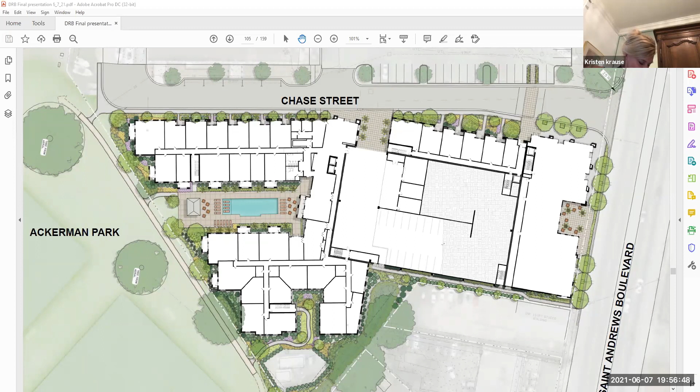That was interesting. Are we on recording now? No, we're still live with attendees and recording.